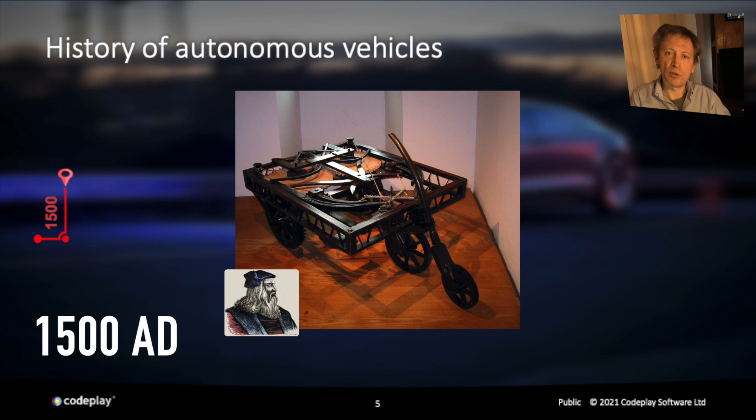From the very first vehicles, people have been looking at ways to automate movements of goods and people. Surprisingly, we start this journey off in the 15th century with Leonardo da Vinci and his car. Many see this as a distant precursor to the car. This device is sometimes considered the world's first robotic vehicle. There's a lot here in this part of the presentation, so I'm going to fast forward to 1977, where software was first being introduced into vehicles to control them.

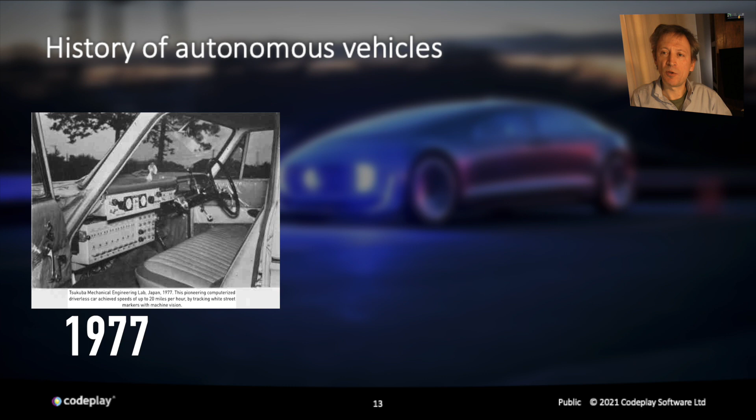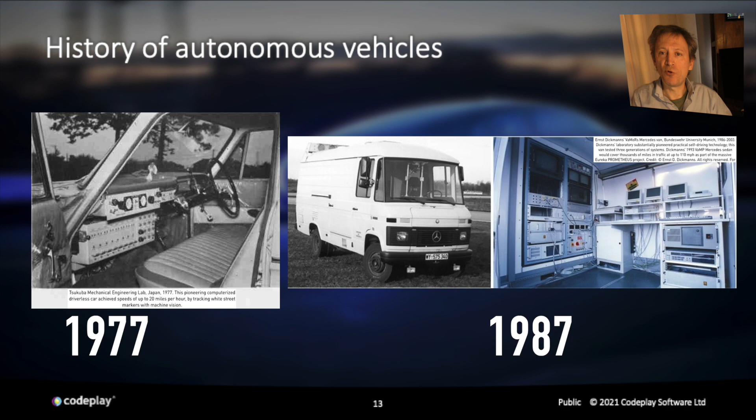Over in Japan, a mechanical engineering lab pioneered the first computerized driverless car, which achieved speeds up to 20 miles per hour by tracking white street markers with machine vision. Later, 1987, which is seen as an important year, a German engineer named Ernst Dickmanns equipped his van with a bank of cameras and 60 microprocessing modules to detect objects on the road. It drove for hundreds of miles autonomously, a tremendous feat, especially with the computing power of the time.

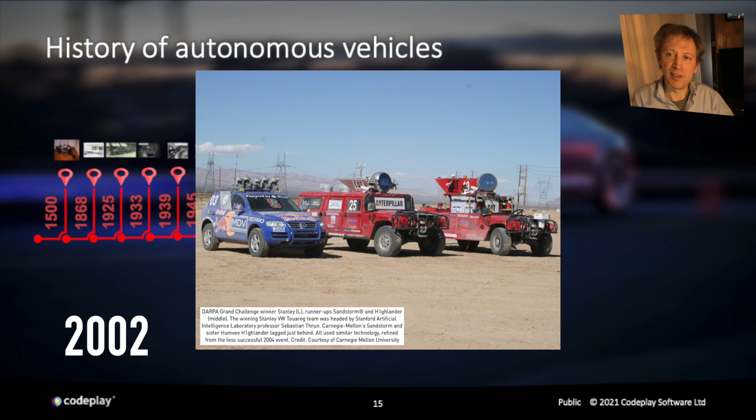In 1995, General Atomics launched the Predator. We all know what that can do. Things started getting serious in 2002 when DARPA joined in and announced their first grand challenge. It offered a $1 million prize to the first autonomous vehicle that was able to navigate a 142-mile course through the Mojave Desert, and that continued until 2014.

Meanwhile, back in 2003, Toyota produced the first ADAS system in a commercial car, the automatic parallel parking system. Google launched its self-driving car project in 2009 in some secrecy, and by 2013 many other companies like General Motors, Ford, Mercedes-Benz and BMW were working on their own self-driving technologies. In 2015 Tesla rolled out their autopilot. Moving along to 2018, Nvidia revealed at the CES conference their new SoC for self-driving called Xavier, the first to incorporate support for artificial intelligence.

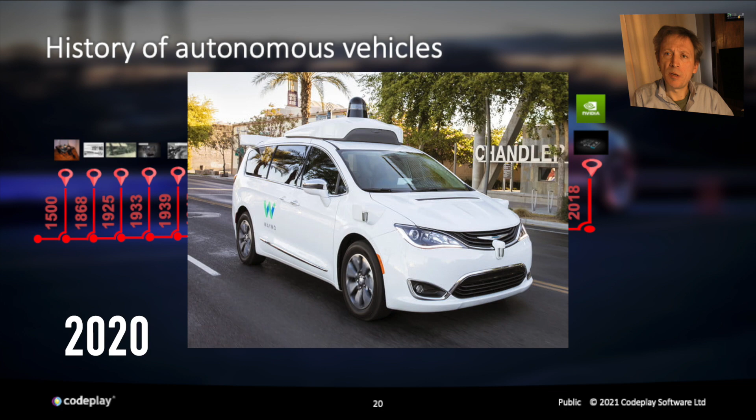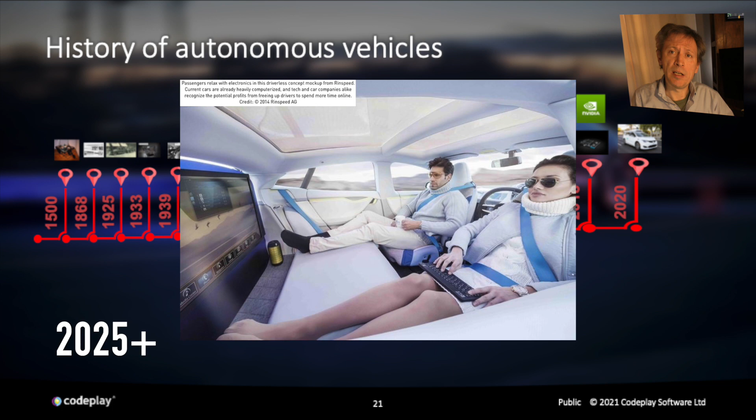In 2020 Google's project was renamed Waymo, and by then Google had clocked up an impressive 300,000 miles of autonomous driving. Today, the industry is investing heavily with new players always joining the field. It is becoming a multi-billion-dollar industry with prospects of flying cars or even passenger drones. Now, to add some context to this timeline, let's drop in when the C and C++ languages appeared. Now drop in when OpenCL and SYCL made their appearance.

And now I'll drop into the timeline the automotive safety standards that were beginning to emerge to address the concerns about software in vehicles as it was becoming more prolific from the 1980s onwards. As you can see here, the safety standards are introduced many years after the technology was first being used, and it is seen by some that the functional safety standards, because they lag the technology curve, stifle the progress of using complex software systems in vehicles. But there is a good reason why these safety standards were developed by the automotive industry. They were there to ensure high quality engineering practices, that the designs work as intended, and above all are safe.

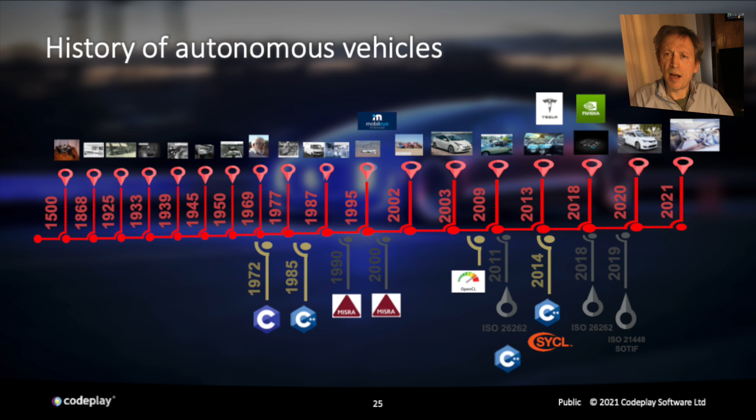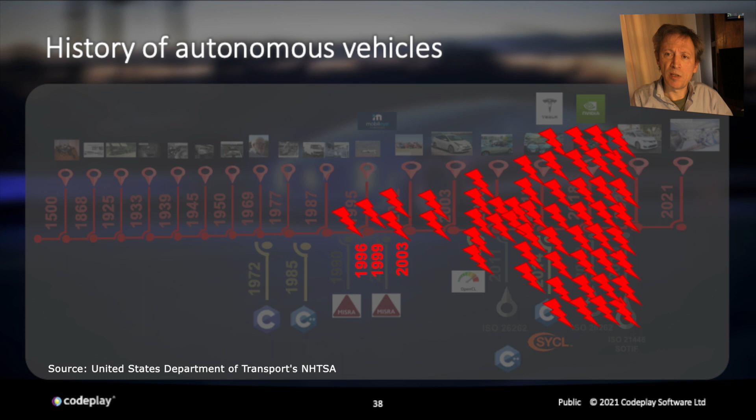The automotive industry knew they had to do something to stop legislation forcing them into doing something they did not like. So what did the industry do about it? Well, they created a safety standard tailored to their industry. In 2011, they published the ISO 26262 standard, and it was adopted immediately by the European automotive OEMs, which is not surprising as the standard was developed by the Europeans. From there, it gradually got adopted by more OEMs around the world. Today, most OEMs follow the ISO 26262 standard, and not necessarily because of legislation requirements, but as a proactive means of establishing a reputation for safety for their brands.

An unsafe reputation damages sales. Some of you may have noticed the notable exception to following ISO 26262 is Tesla, which has its own methodology, for better or for worse. This is not to say that ISO 26262 is perfect. It is recognized by the industry it falls short in many ways, especially when it comes to tackling the issue of AI in cars and enabling autonomous driving.

Hence, there are new automotive standards that have appeared in more recent years to support safety in this regard. A good example is the supporting automotive standard Safety of the Intended Function, or SOTIF for short. This particular standard tries to provide mechanisms that give assurances why complex systems like those used for AI in automotive vehicles are safe.

Now I'll move on a little bit into what is ISO 26262. Its objective is really quite simple: it is the management of faults that could occur in an automotive electrical system, and that is it. It's there for the reduction of faults, which in turn reduces the risks of injury to any vehicle occupants and people in the vehicle's vicinity.

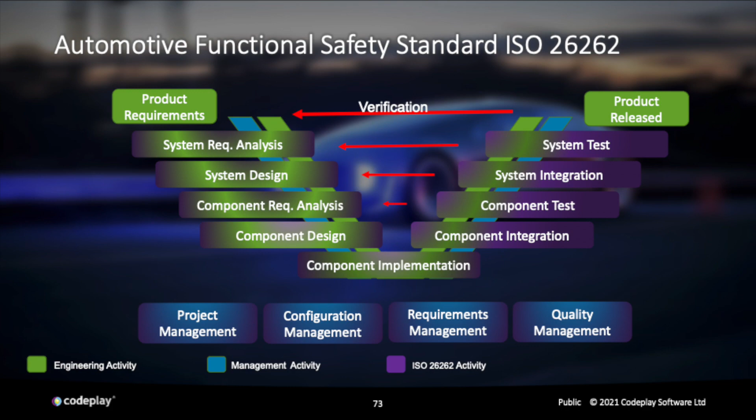The V model represents the development stages of the whole system and for individual components in that system. So, a SYCL application could be a component in a bigger system.

ISO 26262 is about the management of risk. It's there to reduce hazardous events caused by failures in a system. It wants all the system's functions to be deterministic in every way, and so it wants designers to show evidence that they thoroughly understand the behavior of a system in every way, including when any faults occur.

The automotive industry standard bases risk and criticality of a system using ASIL classifications, specified by the OEM. ASIL is an acronym for Automotive Safety Integrity Level. There are 4 classifications ranging from A to D, with D indicating the most critical. An ASIL is an indication of the criticality of the system to control a vehicle on a fault occurring and not causing injury to people.

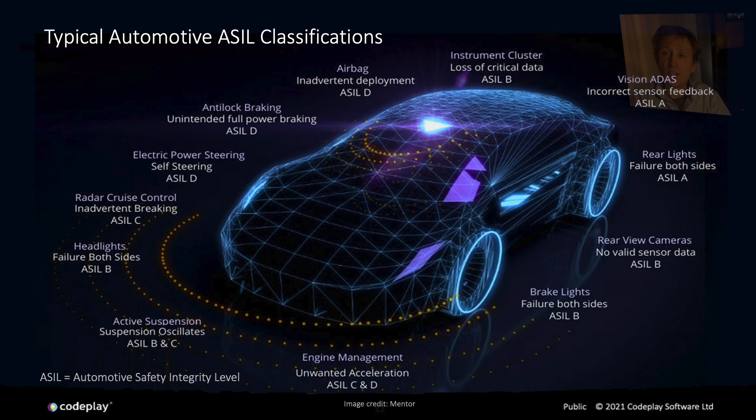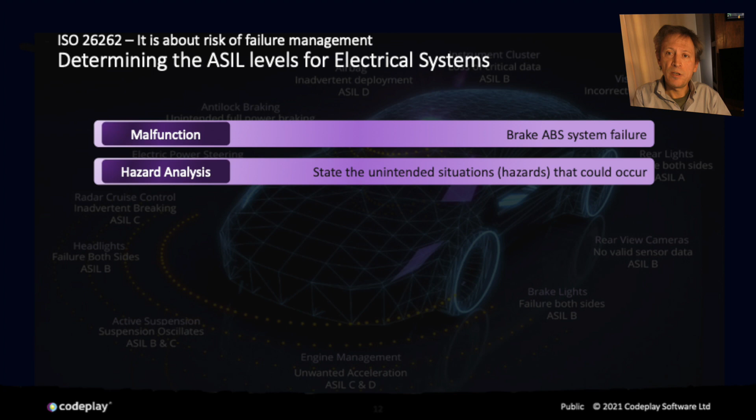Let us take one of these systems and quickly go through how the ASIL rating is obtained. Using the vehicle's ABS brake system as an example, you first identify the hazard that could occur should the system fail. Next, think of all the situations when and how that hazard could occur. Then, you estimate how often that hazard or fault could occur during the system's operation. Finally, you estimate the controllability of the vehicle on that fault occurring and the extent of possible injury to people. Do this a few times for different systems in a vehicle and you have a sliding scale of criticality of a system. This, in a nutshell, is the ASIL classification for systems in a car.

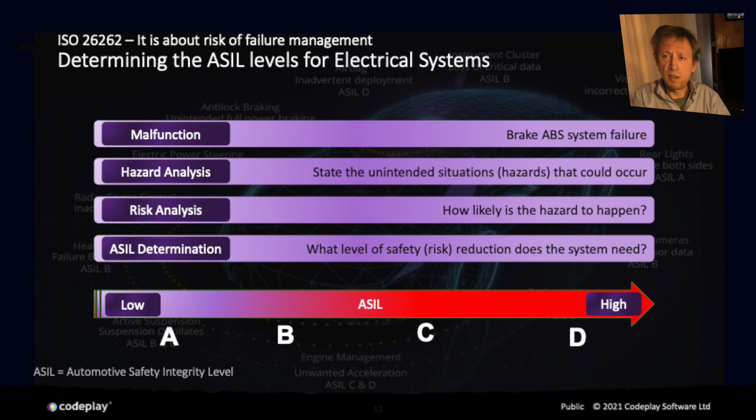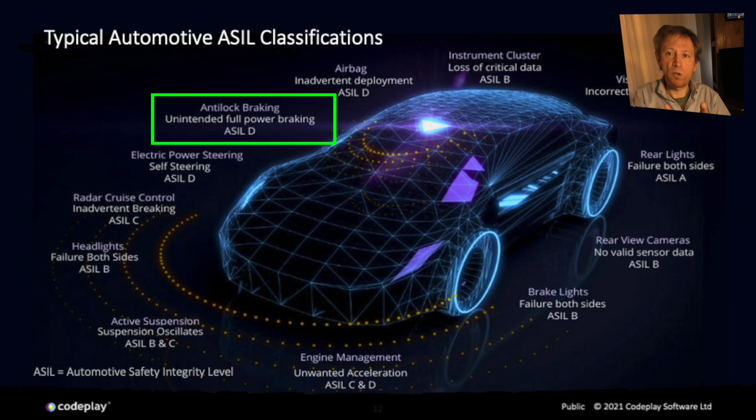The OEM has assigned the brakes on this particular car an ASIL D classification, a very critical system, I think you would agree. This classification is for the whole system, so all the components that contribute to the system inherit the same classification. If SYCL was a component forming part of the brake system, it would inherit the same classification.

Another important principle for ISO 26262 is to have a design reach a safe state. ISO 26262 requires operational safety analysis to be carried out on a system to identify the conditions when faults may occur and design mechanisms that allow the system to react in a deterministic manner, transferring from normal operational state to a safe operational state. This means stopping normal operations immediately and initiating the transfer to a safe state in a deterministic manner.

Transferring to a safe state takes time, and so ISO 26262 has defined the fault tolerant time interval. This is the amount of time from a fault occurring in the system to the hazardous event materializing. Let me show you: a fault occurs somewhere in the system, the undefined system behavior starts to manifest itself to the point the hazard and the injury is very possible.

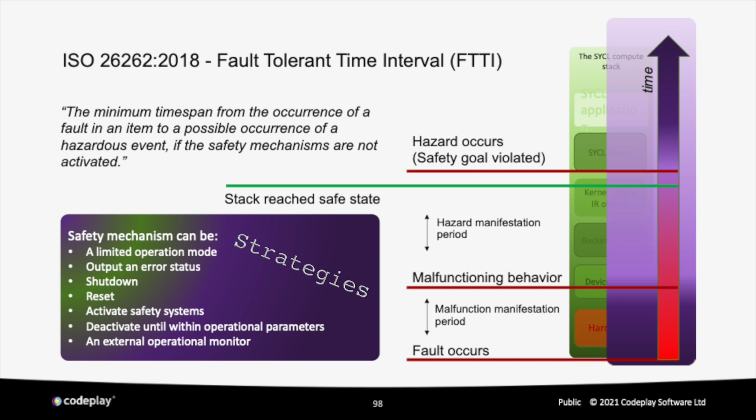ISO 26262 asks that you develop strategies to stop the hazardous event occurring. Whatever strategy is chosen, it must occur in less time than the time the hazard could materialize, and so prevent injury. Think what this means for the SYCL stack.

We have dynamic memory, for example. It suffers from latency issues and so shows indeterministic behavior, and this can cause knock-on effects to other parts of the system. However, this could easily be fixed.

We also have C++ exception handling. This too is not deterministic because it's not defined by any standard. It's up to the compiler developer's interpretation of how that should be implemented. This again could be fixed.

We also have the issue of how kernel execution is managed. How do we manage rogue kernels that do not finish execution? How can we interrupt kernel execution and not enter an indeterministic state?

And lastly, and this is very important, wherever in the specification you see the phrase 'behavior is undefined,' this is a red flag to the ISO 26262 safety standard, and it must be rectified such that the indeterministic is made deterministic.

We now have a quick look at a model of what could constitute a SYCL accelerated compute stack for automotive ADAS, sensor fusion or AI applications. It will generally be a vertical system with the hardware at the bottom and the application at the top.

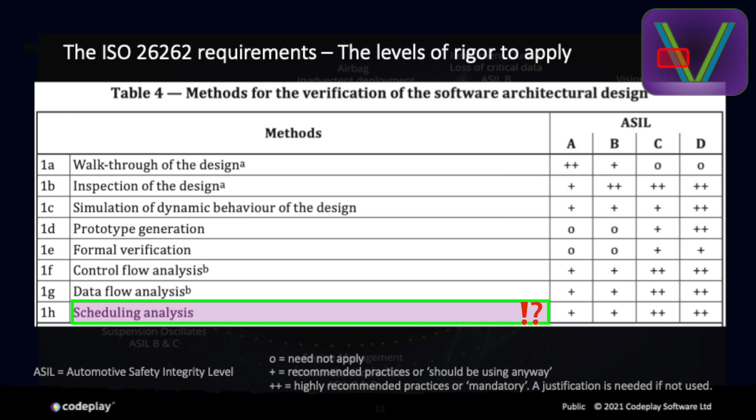ISO 26262 wants to see the stack can operate 24/7 and remain performant and not deteriorate due to poor resource handling. Table 4, methods for verification of software architectural design. There's only one thing in this table I want to bring to your attention, and that is scheduling analysis. This is marked as a challenge, and this particular item complements the other side of the V model, the design and evidence of deterministic scheduling. This requirement asks for evidence that the scheduling within a system can meet a process deadline every time.